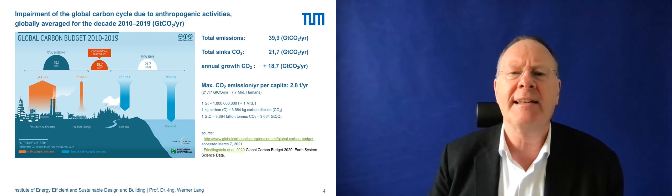So if we take the sinks, these 22 gigatons, and divide that by the world population, we get the figure we would be allowed to emit, because that's the amount of CO2 nature can absorb, whether on land or in the sea. In the sea there's algae; on land there's plants, trees, grass, absorbing and storing the CO2 in their roots, in timber, in their physical appearance.

So that's the goal. When we want to stop CO2 emissions, we won't need to stop them completely, but it has to stay within this absorption ability of our planet, of nature. But today that's the conflict we are facing.

We have an average of about 5.2 tons of CO2 emissions per capita, per person, per year. If we look at other countries, like our own country here in Germany where I'm coming from, we are currently emitting a total of 11.6 tons per person and year. So we have twice as much emissions as allowed.

Heating, the building sector, is responsible for about 1.7 tons. Then we have the electricity consumption of our buildings, mobility comes into play, food, general consumption, and public emissions through infrastructure. That's basically the split of the CO2 emissions we have.

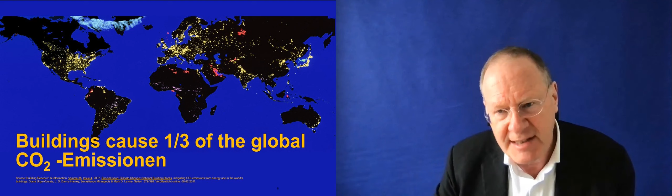And that's what we are already bound by EU laws, by the latest directive. We have to build from this year onwards, from 2021 onwards, every building has to be nearly zero carbon. Nearly means without adding a little bit of photovoltaics or thermal collectors we are below that goal. The moment we put PV cells on our roofs or use thermal collectors or both, we should be, or we must be, really carbon neutral. That's the law, that's the directive.

Reality, of course, is still different. And that's also including not only CO2, but also the resource consumption.

That means materials - we are depleting the resources on our planet. We're taking out of the ground materials, not only fossil fuels, but rare earth elements, lithium for example, for producing batteries and so on. We just take for granted that whatever is embedded in the soil is ours, whether minerals or other substances. That's already a flaw - we buy a piece of land and feel entitled to take whatever is in the ground for our own benefit, our own business model. We have to change that. We have to change the business models.

When we look at other aspects, such as water consumption, which is very scarce in large parts of this planet, a large part of our global population is suffering. We have to look into that in an important way. And the last point, not the least, is global waste generation by the building trade, which is 40% as a global average. Here in Germany it's 52% - more than half of all waste we produce is related to the building sector. So it becomes clear we have to change that quickly.

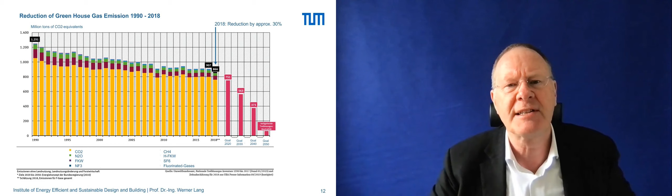The red columns show where we must be by 2050. Since we're already in the year '21, with the policies we have, we are not nearly getting where we're supposed to be. So radical change is absolutely necessary. This search for alternative business models is key to achieve that. Efficiency alone with a little renewable energy is far from enough for achieving carbon neutrality by 2050.

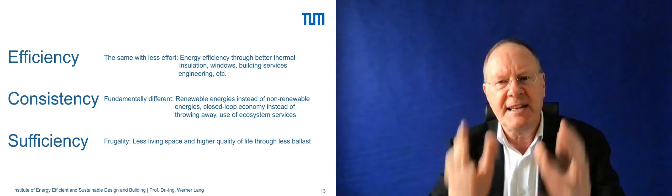In addition to efficiency - doing the same with less effort, becoming more efficient with energy consumption and CO2 emissions - we have to go really to zero, not by 10% or 20%, but truly moving toward zero. This has to be coupled with consistency, a fundamentally different approach: instead of non-renewable energies, renewable energies; instead of non-renewable materials, 100% renewable materials. Where we cannot achieve that, we introduce circularity as a major aspect.

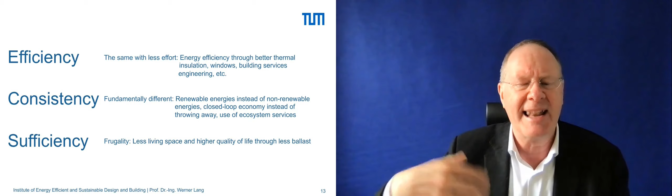The third point, hardly discussed in public, is sufficiency - we have to ask ourselves whether we really need all the stuff we have, at least in our culture, where we fill attics and basements with things we don't need. Less living space is an issue here. We have to ask whether life with less stuff might be more fulfilling than constantly consuming, throwing things away, storing them in the attic or basement, and complaining that our apartments are full of stuff. Sufficiency is really an important aspect.

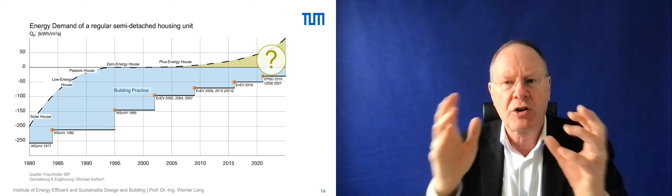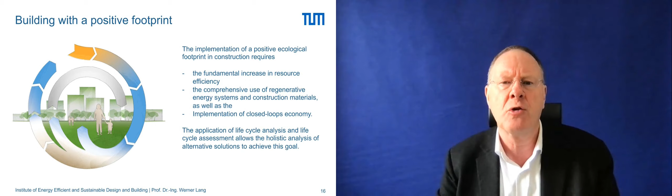In the end, where we have to go with energy consumption is leaving this negative approach - the blue part, the building practice where we're still moving toward less CO2 emissions - and really turn the whole thinking around toward positive thinking. Are we able to achieve principles like building with a positive footprint? That's the question - implementing a positive ecological footprint in construction through increased resource efficiency. Efficiency remains a major principle, but we also need regenerative energy systems, regenerative construction materials, and implementation of a closed loop economy. That gives us the chance to move toward energy positive building.

And we have done that already. Werner Sobek was one of the first to win a public federal competition with an Energy Plus house quite a long time ago - it's still in place in Berlin, beautiful architecture, a very good example. We've done a similar example closer to market value, since an experimental building is very expensive.

We try to stay within the economic limits of single family homes, which is questionable as a principle here in Germany, where we have to use multi-story buildings instead. But for now, we use this example to show that with really good thermal insulation, photovoltaics on the roof, heat recovery systems, and geothermal energy, we can really get there.

You see the simple principles: a highly insulated building with photovoltaics, and a heat pump system coupled with shallow geothermal energy—not 100 meters down, but just a few meters, using the below-ground temperatures that stay the same most of the year for heating in wintertime and cooling in summertime.

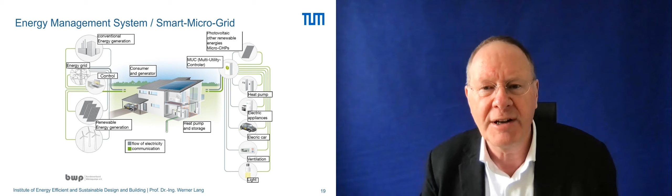And of course with batteries too, which aren't really that extensive—more in the range of 6 kilowatt hours of storage capacity. If compared to a car, modern cars are starting right now with 36 kilowatt hours. So that's very important. This is just an example to show it can be done.

This has been implemented like you saw before. And the second very important topic is circularity, where we show what we're doing with the material. This building was done with students in Austin for the Solar Decathlon 2015. We were part of that from the Technical University in Munich, and since I taught at the University of Texas before, we did it with a colleague of mine.

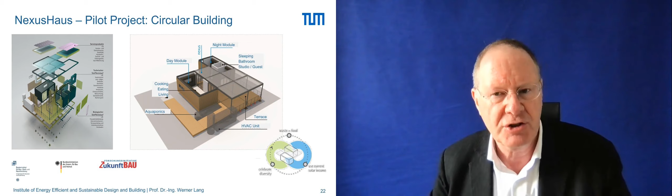We showed that with recycled material and the process of designing for disassembly, with joints that can be opened for the construction, we managed to do a building fulfilling the Energy Plus aspect, where we're also running a car with the additional energy we generate, plus what we need in the house. We designed it in such a way.

So I hope that the animation now works here. Let's see.

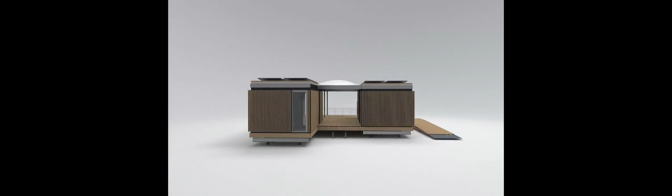And after the competition, it went back to the desert setting in Texas for a research facility, where we now have guest scientists living in that building. This shows it can be done even with students, using renewable energies, a fully recyclable building that could be used anytime at any location, with design for the climate done in a similar way in the future.

So we have to keep these buildings in a complete circle. Coming to the conclusion, and bringing the whole concept into an urban environment.

On a building level, we must look into ways to couple efficiency, consistency, and sufficiency. The building materials have to be kept in a complete circulation. Buildings must act as raw materials, like warehouses almost, for future construction projects.

If you're interested in that, look into BAMB, a European Research Project—Buildings as Material Banks—a large research project focusing on that, where we have been part of it. And the life cycle assessment, where we look into the whole life cycle, has to be the base of our design.

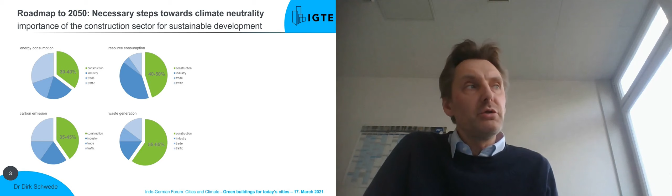But of course, the context where we start and what we find to solve these problems is different in different places. What is also important, not talking so much about the problem—but it could be a problem, but it could also be a contribution to the solution—is that the construction sector is also a great part of the economy.

That, of course, poses a lot of danger to sustainable development, but it also creates a lot of chances, a lot of opportunities, because the construction sector does a lot of harm to the environment and sustainable development, but it can also be understood as a business opportunity to develop countries. For example, when cities are built and there's a lot of urbanization going on, there is a lot of need for construction, a lot of need for materials, and so on. That poses not only a threat, but also opportunities to do it better from the beginning.

Now what is even more important: almost 100% of people live in the constructed environment, the built environment. That means we not only talk about the problems—emissions, energy consumption, resource consumption, and the economy—but we talk about the people in the city, in the buildings. And then we have to talk about quality of life.

And we can also connect to the topic Professor Lang introduced—the sufficiency issue—what people are satisfied with, and how we can create quality of life perhaps without using so many resources. This is something we would like to investigate in our projects.

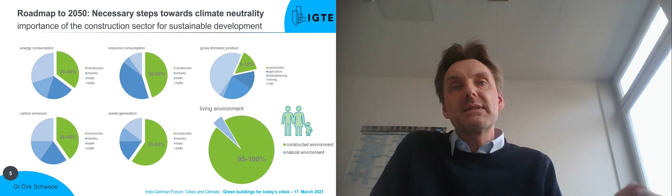They have a master plan with a vision, and this vision could be used in many cities, in many countries around the world. It's always the same: we want to have a sustainable city, a vibrant city, a resilient city, and we want to have a smart, efficient city, and so on.

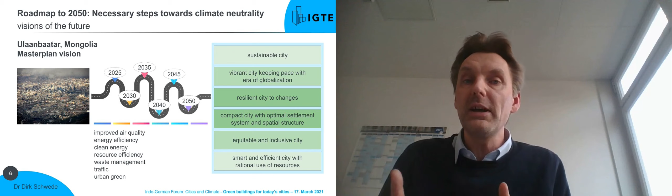But the question is, how do we get from the situation we have today—a lot of energy consumption, a lot of pollution—to the situation we want to have? By that, we have to address topics like improved air quality, energy efficiency, clean energy, resource efficiency, waste management, traffic, urban green, and many other topics. It's a very complex issue.

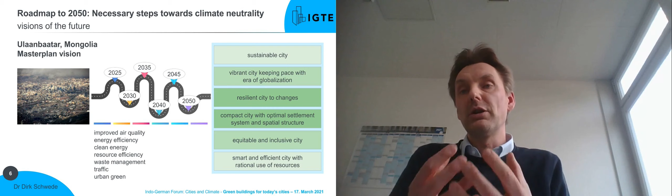This is why there is now a movement towards creating roadmaps. There is an initiative by UNEP, supported by GIZ, which is developing roadmaps for regions, but then also for different countries and perhaps for single cities. In these roadmaps, we have to define what the steps are.

And here I brought some examples. For example, the greening of the energy mix - that is a task we have to fulfill all around the world, from the fossil fuel-based energy mix over some steps to a green energy supply. We can't do it in one step, and we can't do it without planned steps, but there needs to be a roadmap, and we need to take the time to do it with some strategy.

The same is also true for the development of key technologies - sustainable materials so we can build energy efficient buildings, sustainable energy systems, for example air conditioning systems. We know where we come from, but also where we go and what we can achieve in future, because most of these technologies we need around the world are already there. They are in laboratories, and in some countries already in the market.

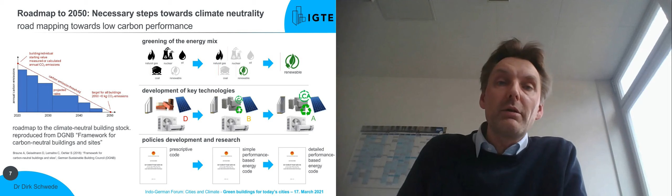So we know where we want to go, we know where we come from, but we need the steps in between, because no country can just jump from one to the other. We need to develop policies and also research and development initiatives, perhaps from a prescriptive building code to a more performance-based building code, as is happening in many places around the world. On the building level, this is also very important so that we don't run into lock-in effects.

It might be in some countries that it's not the right time yet to build plus energy buildings or buildings with building integrated photovoltaics. But we have to make sure that we can retrofit these technologies, that we can improve the buildings we build today for the people, to be sustainable in future, because most economies cannot do this in one step. So we have to have this target in view and understand which steps are necessary to get there, and then start walking in the right direction.

At the moment in the European Union, we have refurbishment roadmaps for building projects where building owners have to define which steps they want to take towards carbon neutrality. They don't have to implement it in one go, but can implement it in steps, and this is very important.

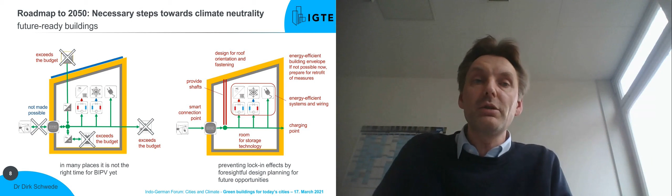And now I want to talk about our projects in Vietnam. Here is the CAMaRSEC project, the Climate Adapted Material Research project in the socio-economic context in Vietnam. It's funded by the German Ministry of Education and Research within the FONA program. Our research aim is to build research facilities needed to provide the knowledge for the application of the new energy standard.

There is a new energy standard introduced, but the market, the industry says we can't use this standard because we don't have the materials, we don't know how the materials perform. So we need to build up testing facilities to characterize simple materials - how is the heat conductivity, what performance do these materials have, and also what is the impact of the material over its life cycle.

There is a movement from burnt bricks, which consume a lot of energy and resources, towards more resource efficient materials. So in this project we are also doing life cycle assessment studies and so on. We find that the researchers in our partner universities are good partners to discuss with and to introduce these topics.

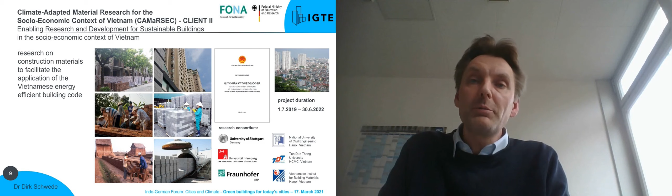What we also do is develop climate data sets so that energy consumption can be modeled and simulated. We integrate the effects of climate change, because in the last 10 to 30 years, temperatures rose. So we need new up-to-date climate data sets to do our analysis of buildings in order to plan energy efficient buildings there.

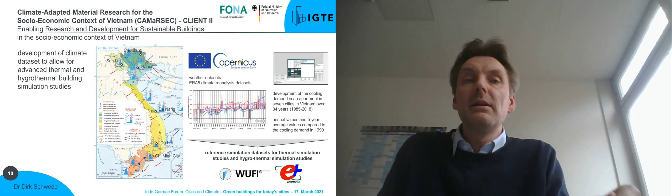We also do measurements in buildings so that we understand how the apartments are used and operated, because we know from the past and from our experience in Vietnam, China and other places, that the people using the buildings and apartments are very sufficient - they don't condition the spaces, they don't heat the spaces too much, but they adapt to the environment.

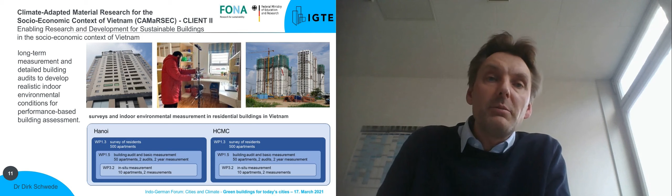But this behavior is changing. People want to have a higher quality of life, so controlled temperatures are coming, and with that the energy consumption is rising. With this, in our project, we determine information on the indoor climate. What we also do is what I talked about before - here we work together with the Fraunhofer Institute for Building Physics in Munich and in Stuttgart.

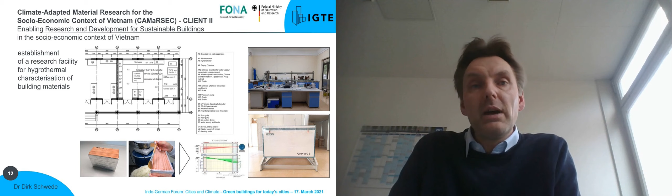We build up laboratory equipment and laboratories at the Vietnamese Institute for Building Materials, where the materials can be characterized so that the market has the information it needs to build energy efficient buildings. This is what we do at the moment in our project CAMaRSEC, Climate Adapted Material Research in the socio-economic context in Vietnam. So we connect many different areas, but develop technical background for the application of energy efficient and sustainable buildings.

We have another project in Cambodia. This is a Build4People project, very much focused on urban quality of life. Here we have different work packages. We work together with environmental psychologists who look at how people live, what are their desires, their aims, their objectives in life. Then we have the work package on sustainable building, where we look at how that can be implemented in the building structures. We have a work package on sustainable urban neighborhoods, which is related to the buildings. The buildings are constructed in the neighborhoods and there is some interaction.

The outdoor spaces are very important. So we have also someone looking at urban green and how urban green can be improved in the city, looking at urban climate. This is also very important. There's modeling done on how the temperatures are in the city. And we have, of course, a work package looking at urban transformation, where we look at how this relates to the policy framework and what can be done in the policy framework to move all these topics forward.

This is also a long-term process. We just started this research project for the next 4 years and hope that we can continue afterwards with the implementation phase. Now the research and development phase is starting, so we have a long-term approach here, and we will do a lot of workshops to understand the condition in Cambodia, in Phnom Penh, and how we can work together with local stakeholders to improve the situation or to make suggestions for that.

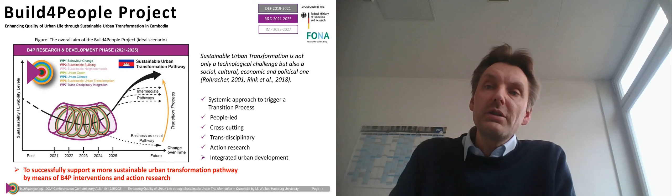Altogether, I would like to summarize that the roadmap to 2050 towards climate neutrality is not so easy. It's hard to talk about and to achieve green buildings for today's cities. We need to be thoughtful and need to do steps today. We need to be strategic and aware that we can't really do it in one go and one step, but that there are single steps to be done.

A climate neutral building stock needs a local approach and a concerted action of many layers of politics, economy, and society, and also a reliable policy framework which we can set up in a roadmap to create business opportunities. It gives security for the market stakeholders, and that is very important to achieve the goals.

And then, of course, we are here at a research conference. Research and international exchange is needed and supportive, but we have everywhere different starting points. We have a common vision, but different starting points. So the research must focus on understanding the starting point conditions in order to move forward in the right direction, but with a locally adapted approach. Thank you very much. I hope we can continue with the discussion after the presentations.

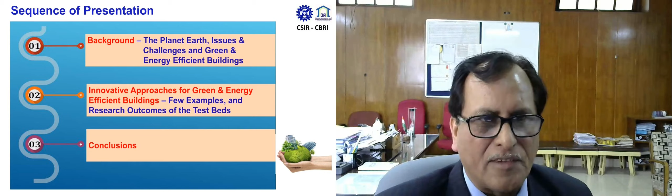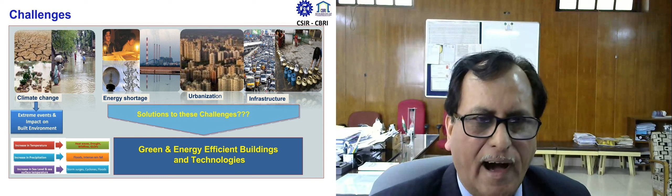If you see the challenges in the background, we have climate change, energy shortage, urbanization, and infrastructure. All these challenges are bothering the entire world, and designers, architects, planners, and scientists are trying to come out with solutions. I think green and energy efficient buildings and technologies are one of the solutions to overcome these challenges.

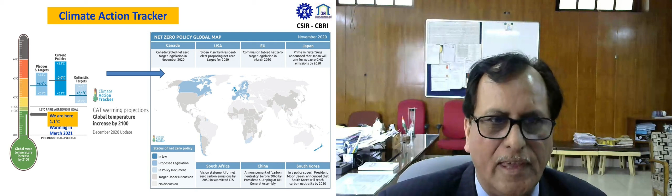If you see the climate action tracker, we are concerned about the scenario at, say, March 2021, where the temperature is 1.1 degrees Celsius higher. This means we need to develop policies at the global level, and some countries have already taken initiatives to come out with a policy roadmap to address these issues.

Another challenge is that the planet Earth has a finite size and we have limited resources. Humans are using more than 1.6 times the amount of resources that we have. The Earth Overshoot Day fell on the 22nd of August 2020 last year, which was three weeks later than 2019. But due to the COVID-19 pandemic, the ecological footprint was lessened, shifting resource consumption patterns in a short time frame, which was only possible due to the pandemic.

The definition of Earth Overshoot Day marks the day when humanity's demand for ecological resources and services in a given year exceeds what the Earth can regenerate in that year. This means sustainability is what allows us to thrive on Earth, and this can be achieved through research, planning and design, and not by disaster. So we need to be very careful in that.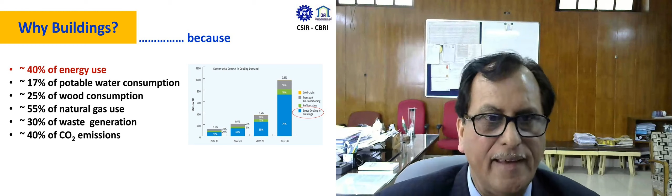Why are we concerned about buildings? Because approximately 40% of energy use is in buildings, approximately 17% of potable water consumption, about 25% of wood consumption, about 55% of natural gas use, about 30% of waste generation, and as rightly mentioned by Professor Lang, about 40% of CO2 emissions. So we need to find solutions to these challenges that are bothering the whole world.

Green building, as one of the solutions, is defined as a high performance building designed, constructed and capable of being operated in a manner that increases environmental performance and economic value over time. Although they look similar, there are differences in operational savings, investment savings, overall resource efficiency, and providing better human comfort and productivity. Although the overall cost may increase by 5 to 30%, the payback period is around 3 to 6 years.

Based on this, why do we need so-called green buildings? That means to save emissions - that is the single point agenda - to create less impact on the planet in terms of energy usage, carbon emissions and carbon footprint, as Dr. Lang has already mentioned. This means we must be able to quantify how much a building is consuming, at what time, and what levels of emission it is producing.

Everything is in numbers. If there is no quantification, what can the prescription help in? That means we need to quantify each and every component of that.

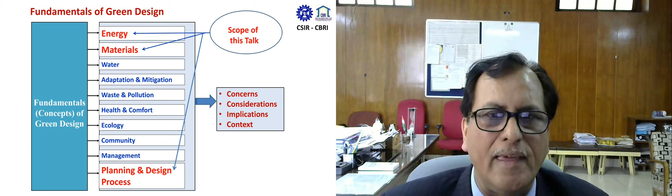If I talk about the fundamentals of green design, we have to consider several components, starting from energy, water, materials, adaptation, waste and pollution, health and comfort, ecology, community, management, planning, design and processes. In my talk, I'm focusing mainly on energy, materials and planning and design processes, where the focus is on concerns, considerations, implications and the context. Context means majorly the Indian context I'm talking about.

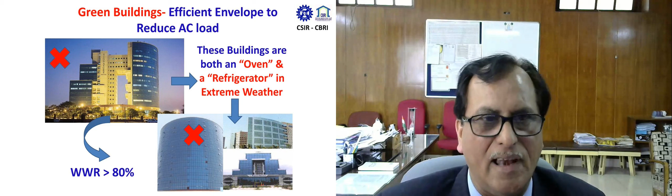So what are we doing? That means if you talk about fundamentals of green design and particularly the energy concerns, we have to minimize the demand, maximize the efficiency, and strategize the resources so that the building is planned in an efficient manner, and also this will lead to a reduction in the greenhouse gas emissions.

So how is it possible? By deploying considerations like building physics principles - we have to develop an appropriate and efficient form, shape, occupant behavior, orientation, and design for daylight, with window to wall ratio, natural ventilation, reduction in cooling and lighting demand, cool roofs, and many other parameters, both in terms of passive as well as building physics principles.

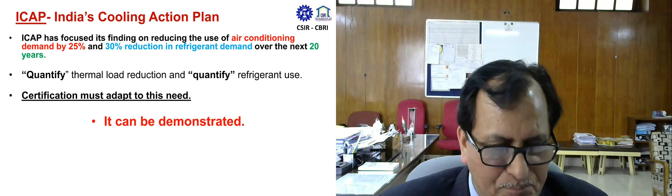Implications means important outcomes. Designing for energy means lowering the operational cost, and also doing better energy savings and lowering the greenhouse gas emissions. So these are concerns and considerations, and also the important points which are very much required to take care of the implications, and the context is India.

As I mentioned, there are several initiatives that India has taken. One such initiative is India's Cooling Action Plan, focused on finding solutions and reducing the use of air conditioning demand by about 25% and about 30% reduction in the refrigerant demand over the next 20 years. That means there is a need to quantify the thermal load reduction and also quantify the refrigerant use by adopting or deploying several measures, and it can be demonstrated.

So the question is, can we quantify the impact of these parameters? The answer is yes, and I will give you some examples.

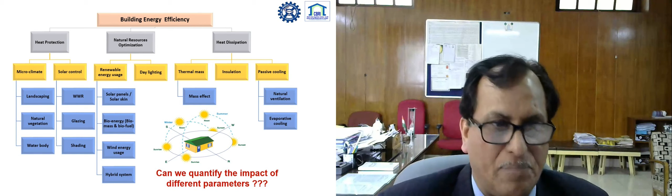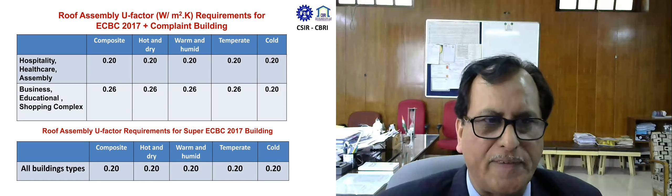As I mentioned, there's an Energy Conservation Building Code in India which prescribes three levels of energy efficiency - that is ECBC building, ECBC plus building, and Super ECBC building, which prescribe different U factor, overall heat transfer coefficient values for roof assembly, walling assembly, and glazing.

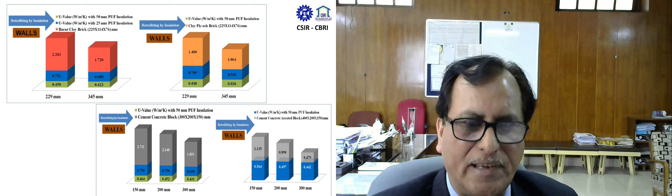So depending upon the thermal conductivity of the material, you can determine the U value, U factor for different kinds of materials. At CBRI we have computed the thermal conductivity of over 300 types of materials, and we have developed a program in the MATLAB program, with around 300 combinations, where we can quantify, and it will serve the purpose.

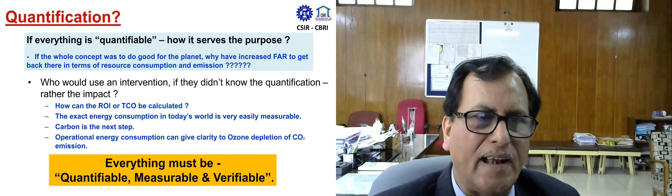So that means everything must be quantifiable, measurable, and verifiable. Quantifiable means by adopting several simulation tools which are available in the market, which can be deployed right from the early design stage as an architect.

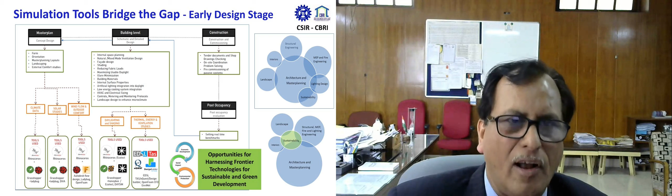So if I talk about the first part, which is the concept design stage, as I mentioned earlier, we can optimize the form, shape, AV ratio and things like that, and then go to the next part, which is the building level, and at the construction level, all these considerations can be deployed. I'll give you some examples where we have used these concepts.

We have done a study where, if I give an example, a single unit receives the least heat gain with no fenestration. But if this unit is grouped into a cluster, a block of 4 in linear form, the longest exposed wall has maximum fenestration, resulting in maximum heat gain.

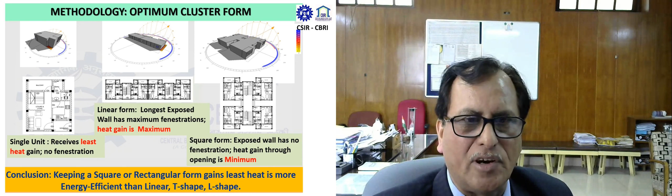Similarly, if this single unit is clustered into a second, third, and fourth unit with a staircase in between, the square form exposed wall has no fenestration, and the heat gain through the opening is minimum. That means keeping a square or rectangular built form is always a better option, with the least amount of heat gain and more energy efficiency compared to a longer L shape or T shape.

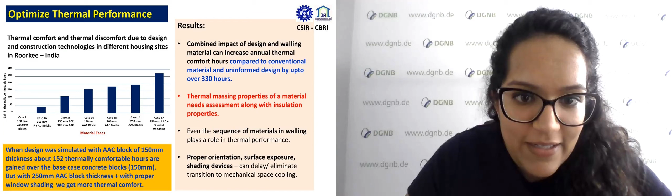And we can quantify the impact of material on thermal efficiency as well, as we have done.

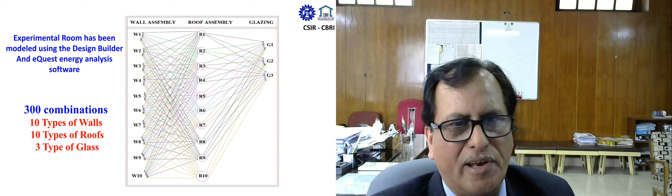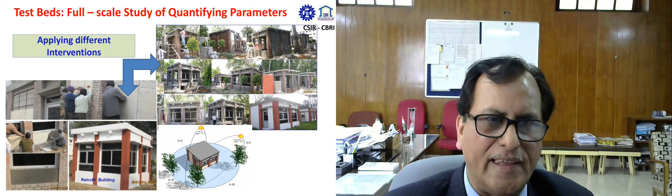We have done studies on real-time models with experimental work to quantify the impact of several parameters like window to wall ratio, orientation, story height, roof and wall insulation, adopting around 300 combinations. Based on these simulations, we tried to utilize this knowledge in demo buildings. There are 2 identical buildings, and test beds created with all these interventions. By adopting 6 interventions, we are getting energy savings of the order of 34%.

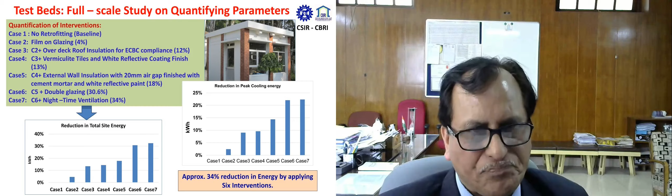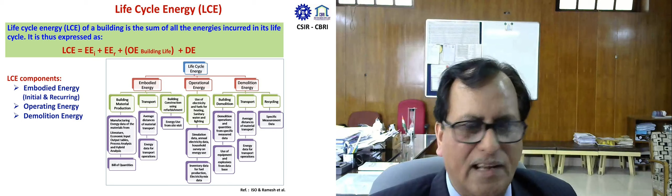This is very essential, and I'll leave the material part, but I can give one example on life cycle energy, which the earlier speaker, Dr. Dirk, was talking about. We have developed an Android app using equations with background calculations on embodied energy, operational energy, and demolition energy. These equations have been used to compute the life cycle energy assessment of a building located in Roorkee, India, including the operational energy of the house.

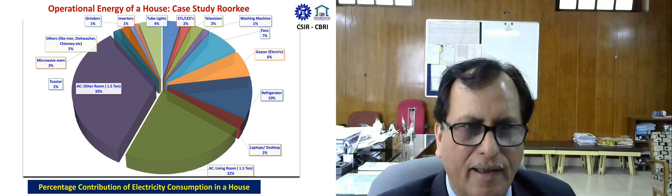That is very essential work. Finally, what we are doing is taking learnings from all these test beds and basic research to currently demonstrate a net zero energy building where everything is quantifiable, measurable, and verifiable. Building physics principles and materials developed at CSIR, CBRI, and other CSIR laboratories are integrated with solar and geothermal hybridization, targeting net zero and also zero carbon building.